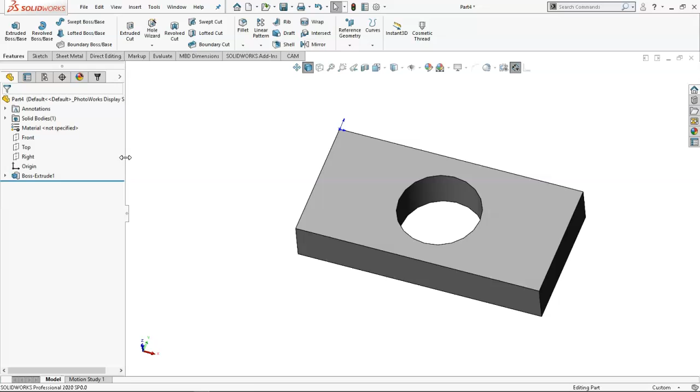Although they still have quite a bit of embedded code working inside of SolidWorks. So just like the Mastercam add-in, I came up to add-ins, went to HSMworks, and activated it. Now it's good for this session.

So my seat of HSM is a commercial version that I purchased with Fusion 360, and as long as Autodesk wants my whatever it is, $500 a year, I will probably be using HSM.

So the same basic process that we went through: we have a tab with CAM on it, and then we have another tab that is the list of operations. And so HSM should probably talk about learning curves. I mentioned that in Mastercam, you kind of have that transferability from the standalone version over into the Solids. A lot of the same type of operations, just maybe a little bit different in the setup as we just showed.

HSM has a pretty light learning curve. Some of the operations may seem a little bit weak. At least when I first started using it, it seemed like it could do, should do a lot more. What it does well, you don't have a very high learning curve for using it.

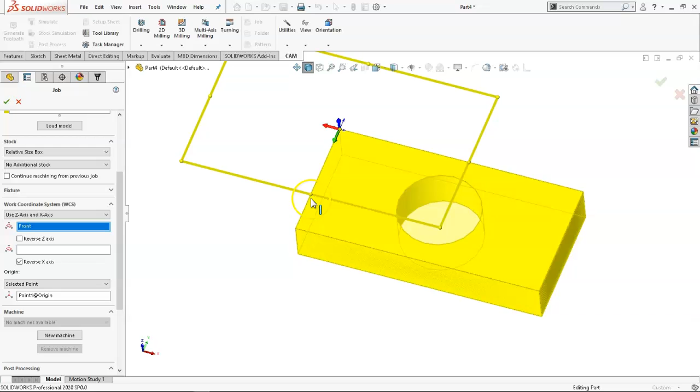So I'm going to pick the front face, which aside from the color issues, did select correctly, and then the X direction is going to be a line, and lastly the origin is going to be the vertex, pretty much lying at the origin.

My program name is program 1, and the comment will be whatever I want for the description. We're setting the block -- except I can't spell block. There we go. And then if we do a work offset, maybe I want to go from G54 to 55.

Very similar to Mastercam in that respect: 0 and 1 are G54, and if we go up to 2, then it's G55, 3 is G56, and so on. We can move up through those work coordinates, but most of the time I'm working in G54.

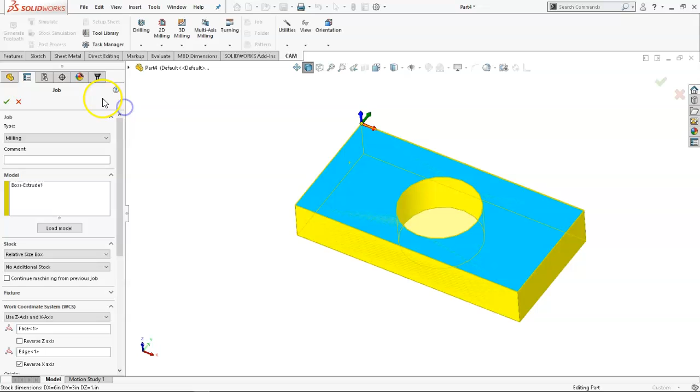So once we've established that job, now it knows where it's located. We have that same XYZ at the origin. Depending on how we manipulate the stock, then we can go back through and adjust for the oversize.

New operation, 2D milling. We're going to be doing a facing operation. And then I have the same type of library of tools, right?

So this one is laid out -- let me stretch that out a little bit if I can -- and we go to by type. I haven't brought them over, but usually in My Libraries, I do have one for the TM1. I have some default libraries.

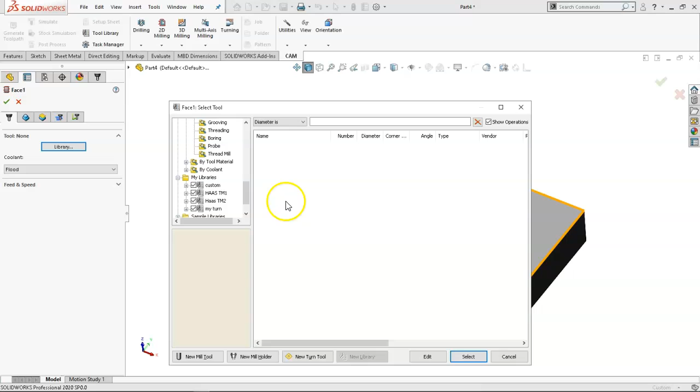So we kind of started down that path with Mastercam. It's still something I recommend: if you have your favorite set of tools, even if they're not tool crib'd where they're living in the machine, having those tools available is pretty handy. So if I go with the TM because I'm doing an operation, let's see, I used a half inch.

All right, so we'll go to the TM2. I'll pick the 1/2 inch, and we'll select it.

My defaults, I mentioned, if I'm changing numbers more than a couple times, I'm writing them into defaults. So I'll have different machines with different RPM levels, and their tools will be copies of each other, but I'll go through and take the time to build in the feeds and speeds I want to run.

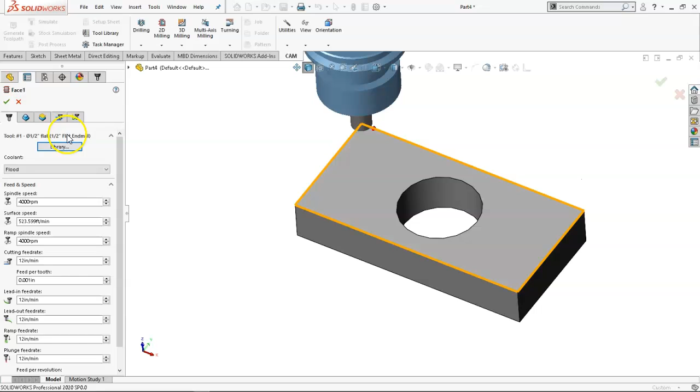That machine with that tool. So when I select it, I'm pretty much looking at this and going, yep, that's it, next. All right, we go over to what it's going to cut. Because this is a facing operation, it looks at the extents, the boundaries of that face, basically the XY plane and the coordinate system, our heights, clearance, retract, and feed.

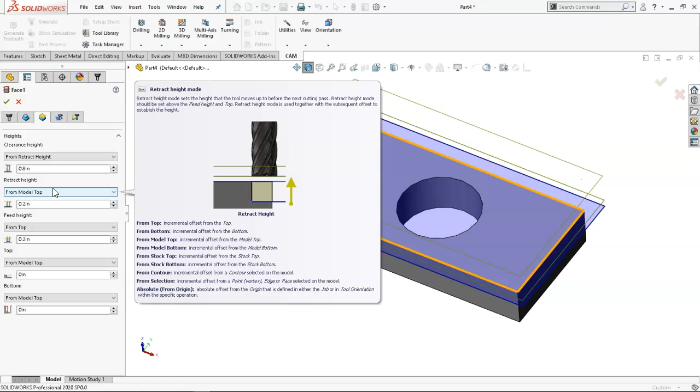So these are incremental values, and this is one of the things I found confusing when I first started using HSM, is that model top is 0 for the facing operation. We would expect that. The feed height is 0.2 and the retract height, so we can manipulate those. Those are both at 200 thousandths.

But then the clearance height is from the retract height. So it comes over here and says that's 0.2 plus 0.8. That makes a clearance height of 1 inch. So you can set those incremental values and have them add up, stack up as you go.

And there are some advantages to that - maybe I always want to have the same separation between my clearance and retract, but maybe I want to bring that retract or feed height just a little bit closer to adjust the feed rate or however far I want to pull it. So I play a few games with these, depending on the machine, how much clearance I need, what I'm trying to achieve with those values.

The pass tolerance and then the step over defaults to 95%. So 475, maybe that would be 95% of the tool diameter. So a little bit wide there. Maybe let's drop back to 300.

If I want to set an angle, pass direction - and the tool tips are pretty good on this program. There's not an extensive help file, so a lot of times you just hover over and go, oh, that's what that does. So it's kind of at your fingertips.

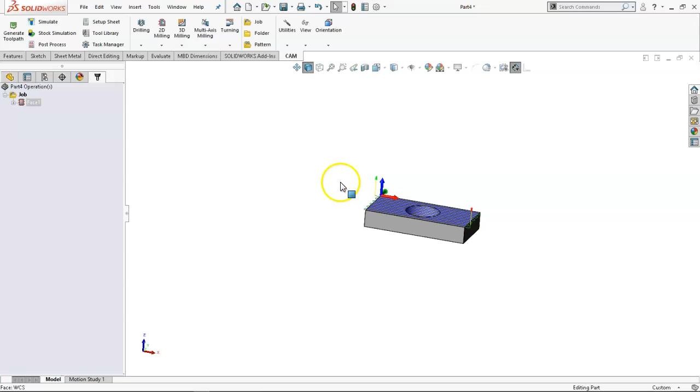And then with the smooth transition, straight line, or no contact, we'll stay with smooth. That'll give us the arcs at the end. So what you can't quite tell until you zoom in is it's coming in 50 thousandths above that face. It switches over to G18 into the XZ plane, ramps in, switches back to G17 XY and starts into the movement. And on the end, does the same thing.

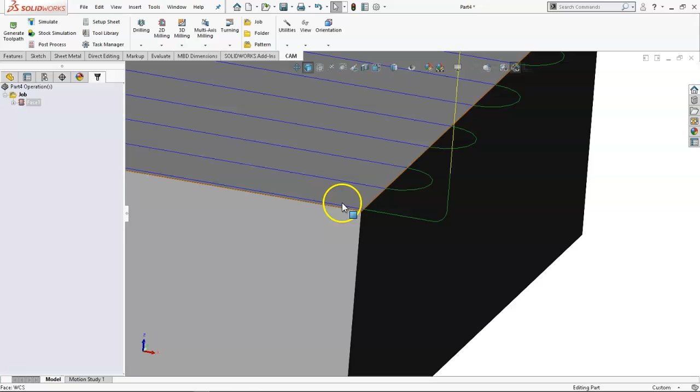So since it's moving, if we didn't include the extended end, it would just kind of get to that point and start ramping up. It's not like it would stay there and just perform the swirls. It's just, like I said, a little disconcerting to some when you're not used to that type of ramp.

All right, new operation. We'll go with the 2D milling, make it a contour. We're going to stay with that 1/2 inch tool. I select it. It finds its way all the way around because we have tangent propagation and propagation along Z. My little arrow is to the interior, so it's going to blow out the center of the part.

We need to reverse it. That puts the arrow on the outside. I can verify that I'm in climb.

But if I did want to be in conventional, I really think these two tabs should be on the same, or these two operations should be on the same tab. But if I come over to passes, there's my right compensation, there's my left compensation. So I still have that ability to change directions.

4,000 at 12 for this machine is fine. We have the edge. We'll go to the retract.

So I've changed this one to 100 thousandths above the part and 0.9. And then for the default, it went back to 10 thousandths. So I actually want that 10 thousandths, but not on all of my contours. So since I see that as a possible problem, especially if I'm contouring something that is interior geometry but doesn't need that, I still want the default to be 0, so I can right click and say make 0 the default, even though I'm going to come right back and change it to a minus 10 thousandths.

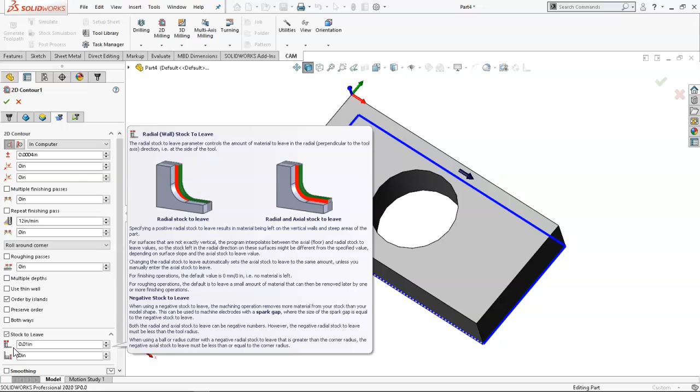Okay, so heights, let's expand that back out. This is going to be the roughing. We're going to leave a little bit more on the wall. We'll leave the 10 thousandths and nothing on the floor. We left the 10 thousandths back over on the other one in computer.

And if I repeat the finish pass, because I'm going to turn the ramping on again, let's see, lead in at 300, but I don't really want it to arc in, so I'm just going to hit 0. I could also have it do that little swoop in. Problem is also that some controls don't like that switching and swooping in and then switching right back. It freaks them out. So I would say just be careful of that vertical lead-in radius when you encounter it.

So 5 degrees with a 0.25 ramp step down. And it's become my habit to, as long as I have that 100 thousandths feed plane, that I will let it continue on about 30 thousandths above the part. So it's really close when it starts in and barely makes it around the part before it starts the tool engagement.

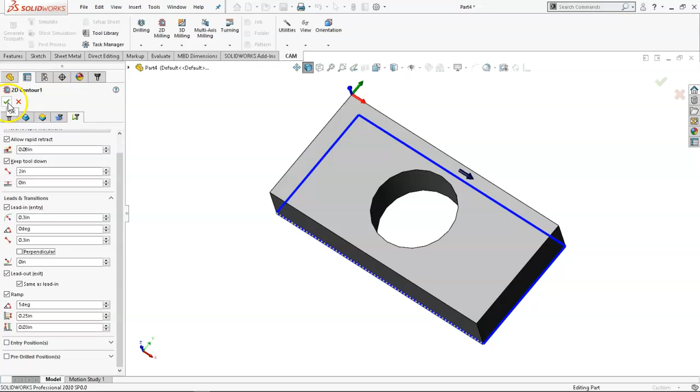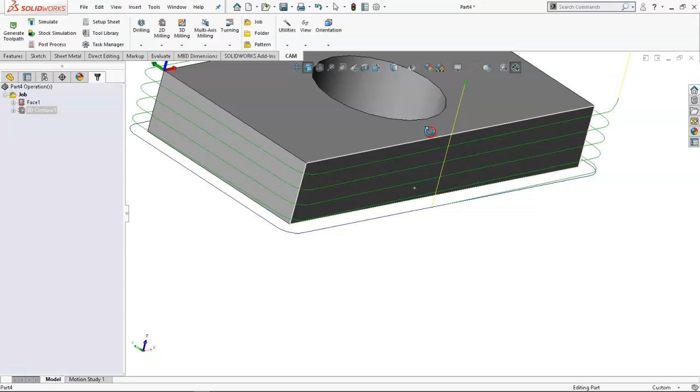And then it started in the middle, finishing in the middle. And that should have just a little bit of a ramp out then. Maybe not. I'm expecting that to move out just a little bit on the out feed. So it sort of did it on the end.

Now, go back and look at that one, and then if I duplicate it, that gives me an exact copy. We can edit it, and then I work pretty much backwards through. I don't want the ramp. We'd have to look at the lead in, lead out, and if it picks up the midpoint again, then we will go back and give it a location to start from.

So I'm going to go ahead and accept that one. Yeah, so it kind of overlaps right there at the corner. So if I edit that one, this one might be better to go ahead and...

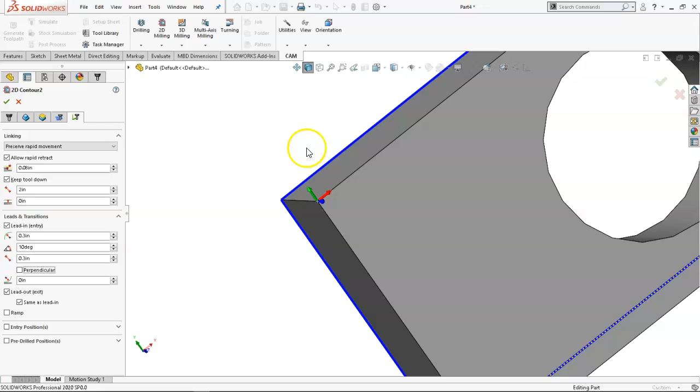For lead in, lead out, we go ahead and put that little bit of an angle, even if it's 10 degrees. That should give me enough to start in and swoop off of the part so that it's not contacting down the edge. So just a little bit of an in, a little bit of an out.

New operation, 2D milling. So we have the 2D pocket. The pocket doesn't have a lot of options. It's just going to do that step over and cut for the most part.

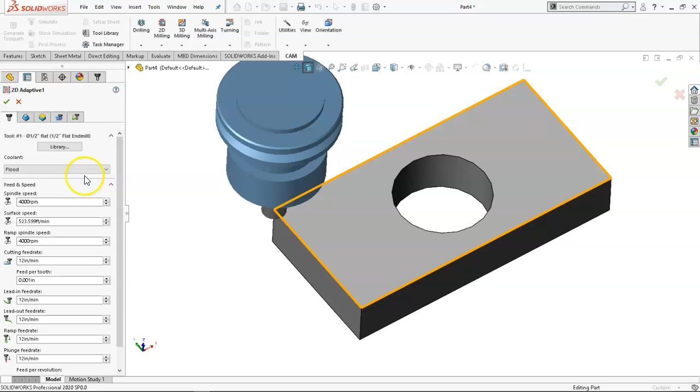So if we go to adaptive clearing, I can stay with those numbers. I want to do something pretty similar. So the model, I should find the face. Actually, I think I'm getting those backwards. We want to do that one, and then we'll pick up the contour.

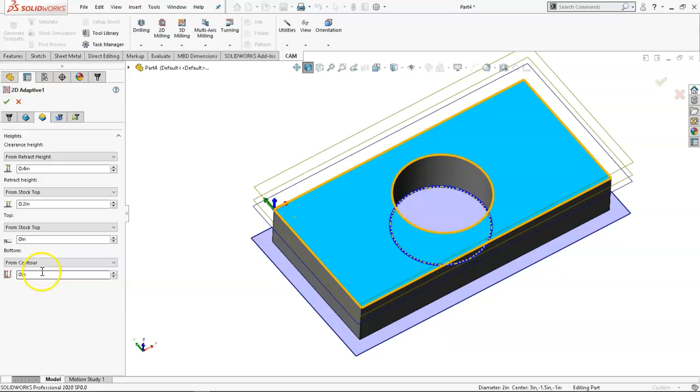400 thousandths above the part, 200 thousandths above the stock, and then from the contour minus 10 thousandths, and step over of 20 thousandths optimal load. We're pretty much burying that half-inch tool 1 inch deep, and so the amount of step over, I'm going to go down to 100 thousandths.

And then stock to leave, nothing on the base, nothing on the floor, and we'll leave 10 thousandths again on the wall. All right, ramp, 2 degrees. Let's see, the ramp clearance height will go to 30. And the step overs, helical ramp diameter, minimum, we'll just tell it to go, it doesn't like 0, so 100 thousandths.

Reduce it. Let's go ahead and see if I selected correctly. I think I got those backwards.

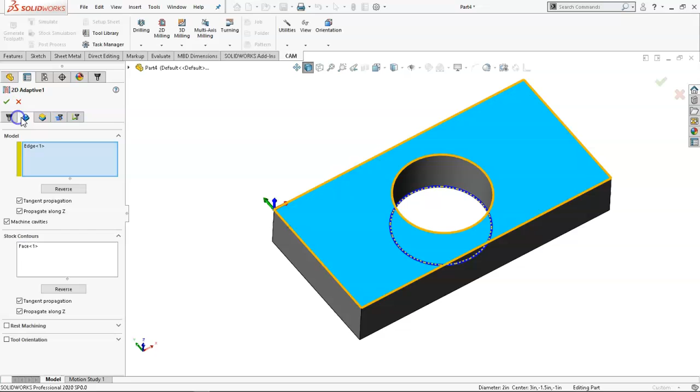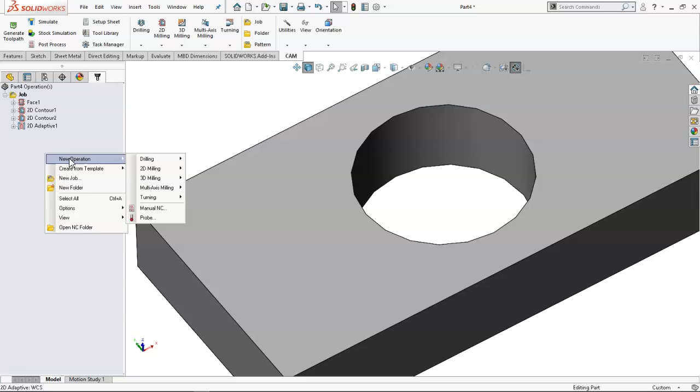So it ramps in, steps over, and then takes that one little lip out. This doesn't have the finish pass included in it, so we're going to go to new operation, 2D milling, 2D contour. Same basic tool settings that we had before. Pick up our edge, arrows to the inside.

And let's go 10 thousandths past for the cleanup. We'll turn our wear on so that we can control the diameter, and stock to leave gets turned off. Don't need the ramp, but I do want a little bit more on the arc, so 45 degrees, 0.1, 0.1. We'll see if that has any gouge in it.

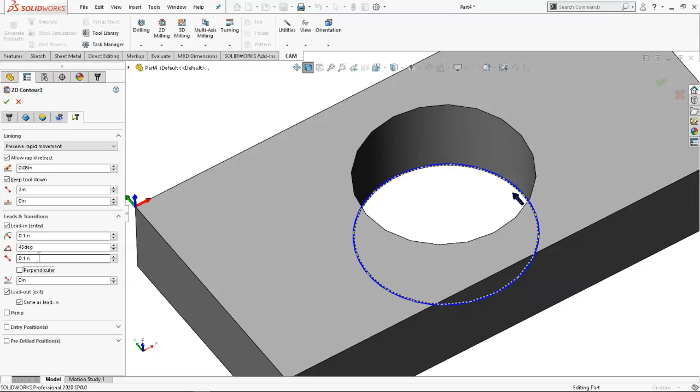All right, so feeds in, goes around, feeds out. So this was my setup 1. I'm going to add that real quick. And then new job.

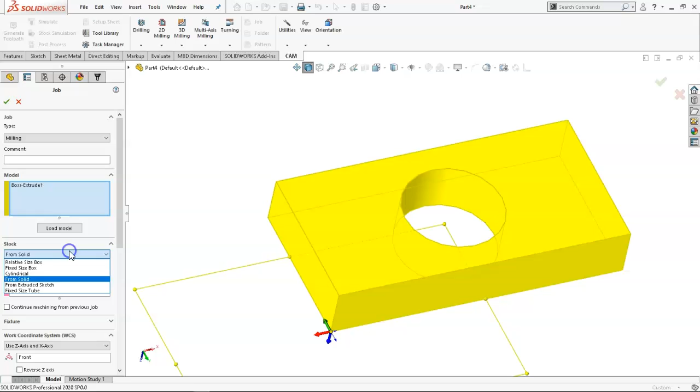We'll go right back through the same set of selections. Relative size box, no additional stock. Pick the face for the orientation, the direction for the x-axis, the location for the origin. I don't like it, we did want it selected, so the edge, reverse. There we go. So we reverse the x-axis, that rotates it around.

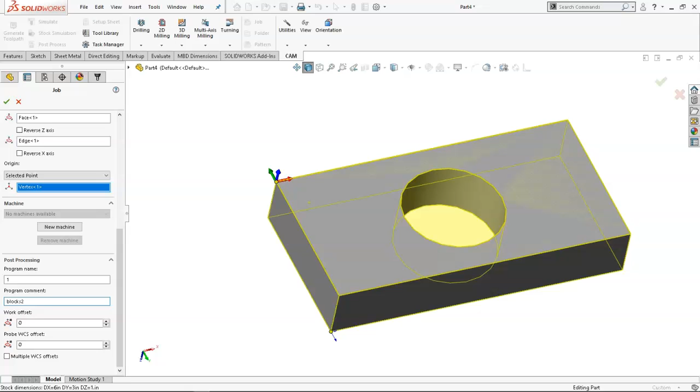Now I have the correct geometry 1, and probably should have put that in the other one, but block setup 2. And then we'll just rename that job. And new operation, 2D milling back to the face.

Right, since it's a new job, it's still showing tool selected none. Let's go ahead and pick it. Here's all the operations that are being used by that tool. And again, because it sees the face, we know that in theory we had 1/4 of an inch.

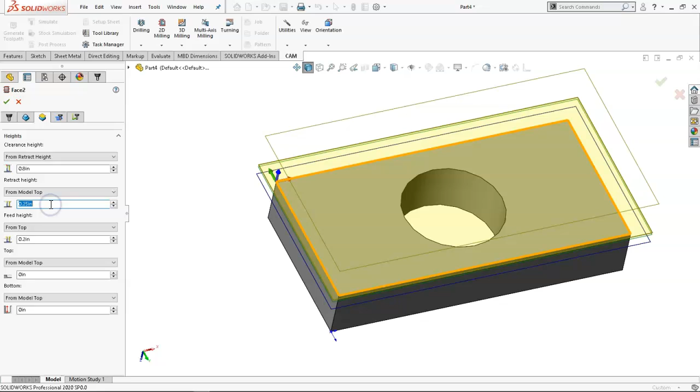So the feed height, let's do a 0.25, actually 0.3. And then we'll let it go from the feed height to the 0. Still a little bit thick there, so 0.3. Direction is fine, and let's just go ahead and turn the lead in, lead out entry.

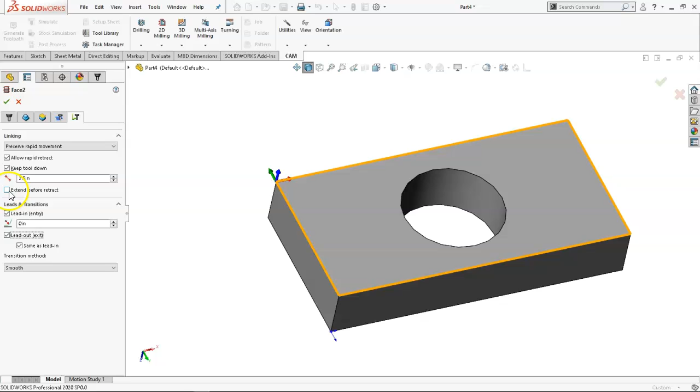Actually, those were the arcs, so if I set that to 0 and extend before retract, should have enough to clear the ramp. So red is where it's feeding down, feeds across. Green is where it feeds out. So as long as everything looks pretty good, don't have to worry too much about the extensions.

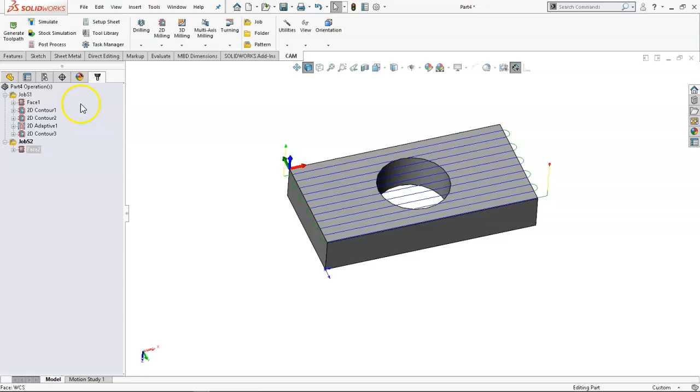Simulation, we're going to do stock simulation, and we'll rotate over. I don't really do the tool holders, so we can turn off the tool holder, set the speed. Otherwise, it'll blow through it so fast we won't really see it.

Works back and forth across the face and makes the cuts. Yeah, there really isn't much material since we did not oversize the stock. What I'm mainly looking for in these, I don't see any heavy gouges, any ramps that take off through the part, or anything that looks crazy stupid as far as a collision.

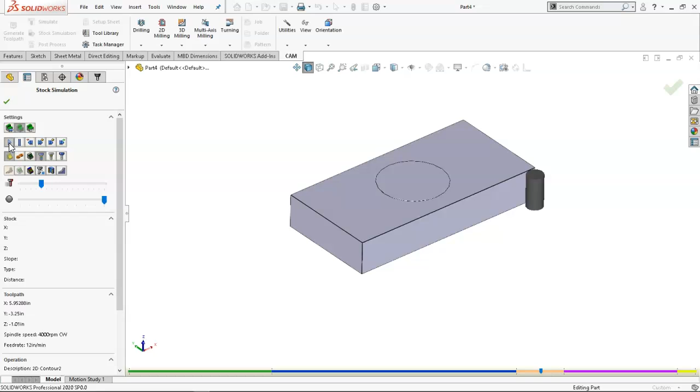And then the finish pass. So if I knew I was going to finish over there, I could change the entry to be a little bit closer, but don't really mind it jumping up and over.

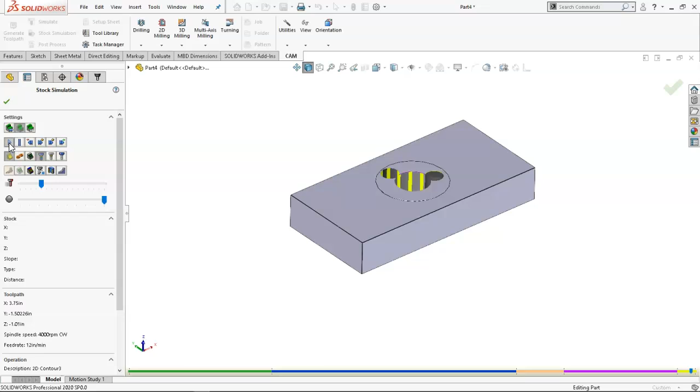Right, and again, with this being dynamic, these fall into the trochoidal cuts. So instead of a pocket being, because of the length, we're getting that one little, the length of cut of the tool apparently is 3/4 of an inch, or exactly 1 inch since it didn't clean out the entire top. So that looks a little bit weird, but that dynamic cut is going to generate at least a couple hundred lines of code, if not 500 or 600 lines of code, just to do that pocket and keep it engaged, because it's treating it as all those continuous XY points as it makes those arcs.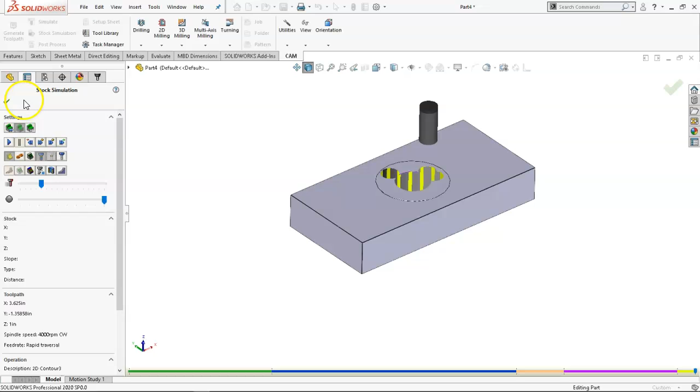And then when it gets to the end, it does the G02, G03 around the outside. So that looks a little weird, it's still not one that concerns me. I'd go back and check my tool length, or make sure that I had the shank included. So worst case, the shank would collide and finish it out.

All right, so like I said, HSM has a little bit lighter learning curve. It has quite a few powerful tools in it, and it does all the way up through the multi-axis. I haven't tried the 2020 version with the lathe. The way that they manage their retract planes, the lathe has been problematic for boring bars. Those internal geometries tend to have issues. So hopefully they've gotten that fixed, and I will be able to take a look at a lathe part later on.

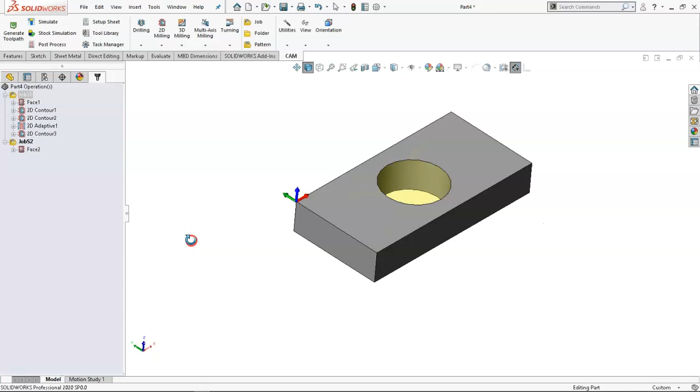So that gives us our view of HSM.